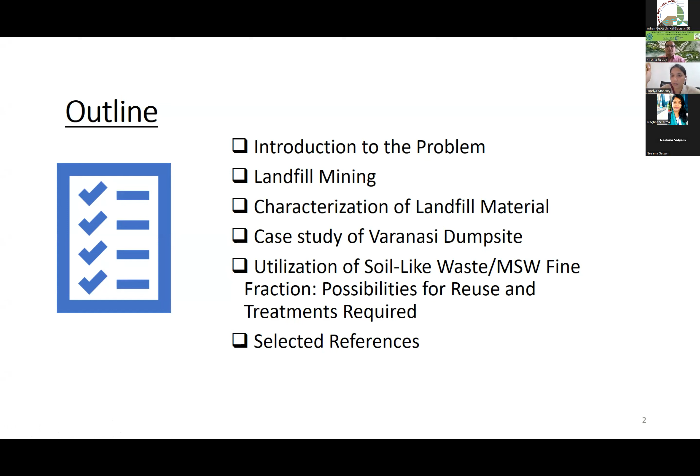We already discussed what municipal solid waste is, and this is the waste we are generating. It is composed of domestic waste, commercial waste, construction and demolition waste, waste from institutes, hospitals, and nearby municipality areas. Combining all, we consider this as municipal solid waste, and the composition of waste changes from city to city and country to country.

So it is our responsibility how we can utilize this huge percentage of MSW in useful applications, particularly in construction or any other useful material.

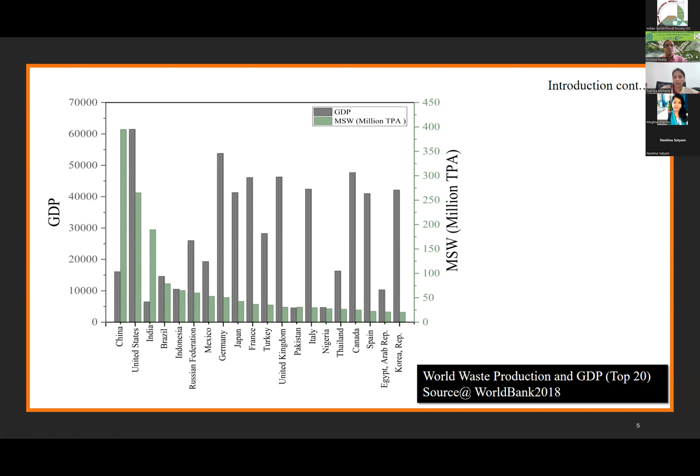Currently we are lacking in the mitigation technique, or management technique, of MSW. So we need to think of this.

The problem with urban solid waste management, particularly in India, is that we don't have a proper integrated waste management technique. If you compare with other countries, Reddy sir is here, he can also address the same. You can see the variability in management technique, and for this we also need support from our government.

Now at least many initiatives have started, like Clean India Mission, Swachh Bharat Abhiyan, so we are getting funds to suggest mitigation or management techniques for solid waste management.

In the Planning Commission report of 2014, nearly 471 million people, about 34.5% of total population, reside in urban areas and generate 62 million tons of MSW per annum currently. It is projected that by 2031, urban centers will generate 165 million tons of waste annually, and by 2050 it could reach much higher. We can imagine how much area we need to dump this waste by 2050, estimated at nearly 43,000 hectares of land needed only for dumping this MSW.

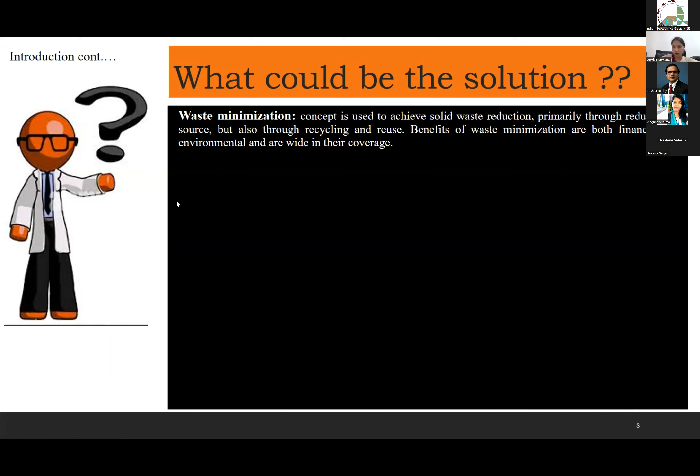At your source point, you can try to reduce the waste. Second, understand the type of waste being generated now. If you compare our waste with other countries, as I showed in the second slide, you can see the composition of world MSW and our Indian scenario.

India is changing from an agricultural based to an industrial and service oriented country, so the waste characteristics and properties will also alter due to changes in living standard and increase in commercialization or urbanization. We need to address this with an efficient waste management system for our particular city - including segregation unit, transport system, monitoring, and investment on infrastructure. We need an integrated solid waste management system for proper solid waste management.

Next, introducing new policy and technique through R&D. Based on research and development, you can try to suggest or introduce new policy or technique for waste management, particularly solid waste management, and some scientific landfill technique also we can suggest.

Landfill mining is the excavation and treatment of waste from an active or inactive landfill for purposes such as reuse of recovered material, conservation of landfill space because space is limited, reduction in landfill area, elimination of potential contamination source, and energy recovery from the excavated waste.

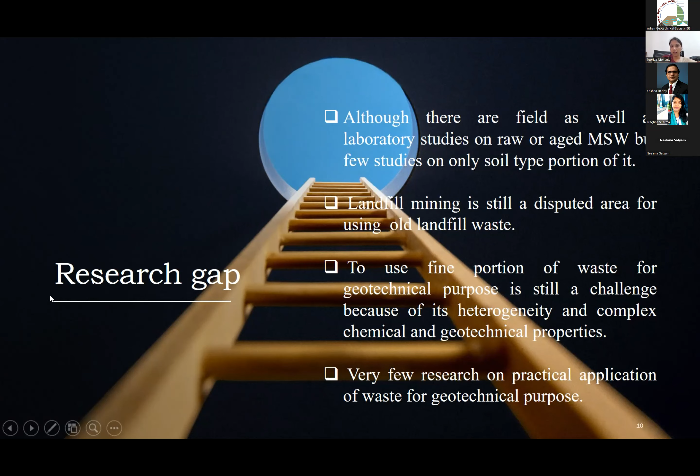Coming to our case study, I will discuss the study done by one of my students for this Varanasi dump area. In this study, we collected raw MSW samples from one dump site, the Ramana landfill site, close to our IIT BHU. Second, we collected the rejected sample from the Karsada plant Varanasi, which is a waste to energy plant.

So they are utilizing the waste to generate energy, and still they have some rejected waste. So we thought of utilizing this rejected waste to improve the properties of this fine MSW fines. After collection of the sample, we went for air drying, then screening by different sieves, and below the 4.75 mm sieve, we considered that as soil-like material for the present study.

For this soil-like material, MSW fines, we have studied its physical, chemical, and geotechnical characteristics. Based on the strength properties, we thought of utilizing waste from another waste-to-energy plant, that is the 4mm rejected sample, the fiber obtained from that second site, to use for improving the soil-like material of the first MSW. So we are trying to utilize waste fiber to improve the properties of another MSW waste, obtaining the optimum fiber composition, and studying its response under different loading conditions.

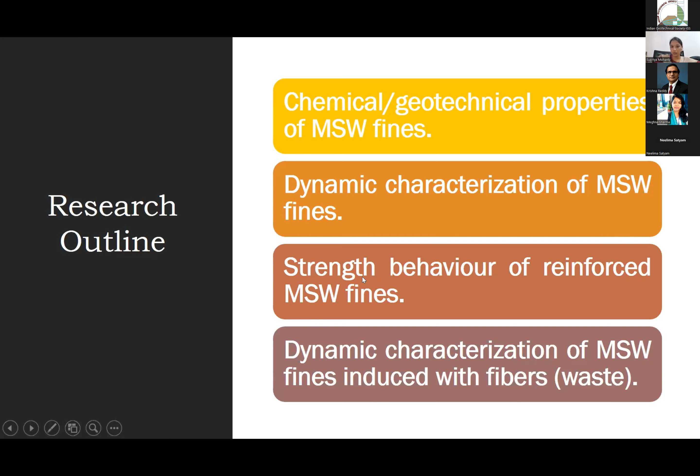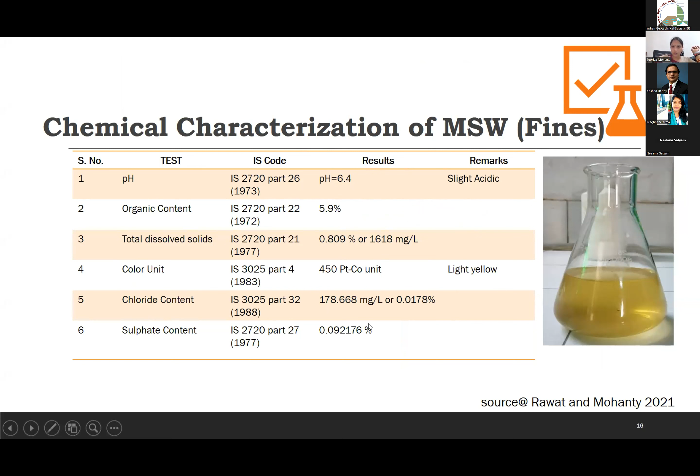The color of this MSW is light yellow, which is a little objectionable, and the chloride, sulfate, TDS content is marginal if you see the percentage. In addition, we also studied the elemental analysis, XRD, XRF, and EDX before strength calculation, because we need to know whether any hazardous material is present in the MSW fines or not. Otherwise, after implementation in the field, it may also affect the surrounding soil and groundwater.

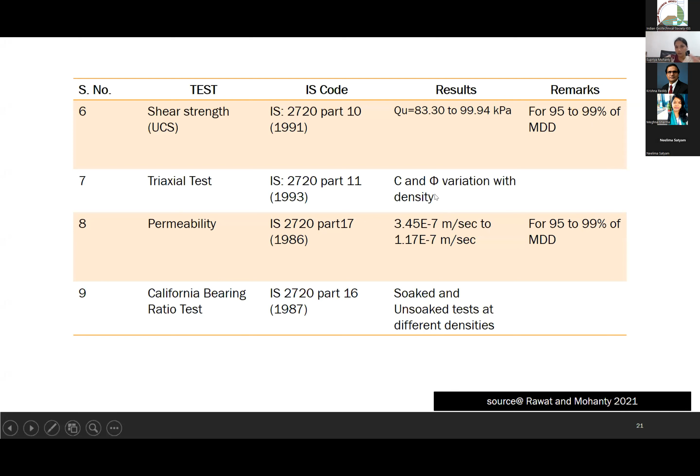So whatever we are getting for the present material, before strengthening it, the raw MSW sample is giving us a good CBR value, which is also suitable for road application. This shows the permeability range. With the increase in relative compaction, permeability decreases. As we know, void ratio reduces, so this means permeability will reduce.

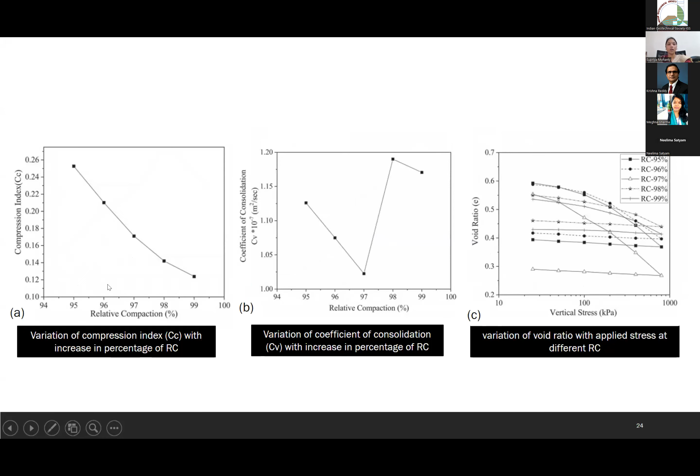The conclusion from this chemical and geotechnical analysis of this MSW fine is without any fiber: nearly 60% of the waste material is non-plastic, silty in type, with medium compressibility, medium permeability, and it is giving us good shear resistance. And if you see the specific gravity, 2.32, this low specific gravity makes it suitable for lightweight fill material. However, the concentration of a few heavy metals, organic content, and color of the leachate could create serious problems if neglected during application. So proper treatment must be required before final implementation in a specific project.

So next, as this present study area is seismic zone 3, we thought of analyzing the dynamic characteristics, because you know how frequently we are experiencing earthquakes, if not in our country then in our neighborhood. So we need to understand the dynamic strength of this proposed material. As you have also seen, after the 2015 Nepal earthquake our code has been revised. We are waiting for another major event, then we will try to improve again. In our revised code, some guidelines have been included for liquefaction study and dynamic study also. So for that reason we thought of finding the dynamic characteristics of this MSW fine, so that seismic analysis can be done for any structure, whether embankment, road, or railway embankment. We need to know the dynamic properties of the subsoil or foundation material.

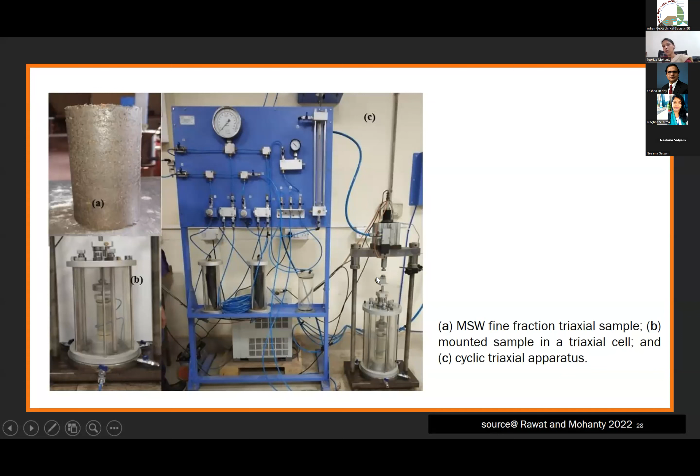So we tried to use whatever facility we have in our lab, the cyclic triaxial setup, to find the dynamic properties: shear modulus and damping ratio. This shows the setup available with us. This is the MSW sample, source sample without fiber. This is the cell, and this is the assembly with the mounted sample. We have to apply this cyclic load by means of this actuator. We can apply both stress and strain control. We have tried strain control, and from that we can get the hysteresis loop stress-strain curve.

This shows the typical cyclic results. This is the input axial strain from the strain control test, and this is the deviator stress variation with number of cycles. The deviator stress is decreasing with number of cycles. Here you can see the pore pressure is increasing, and this shows the hysteresis loop.

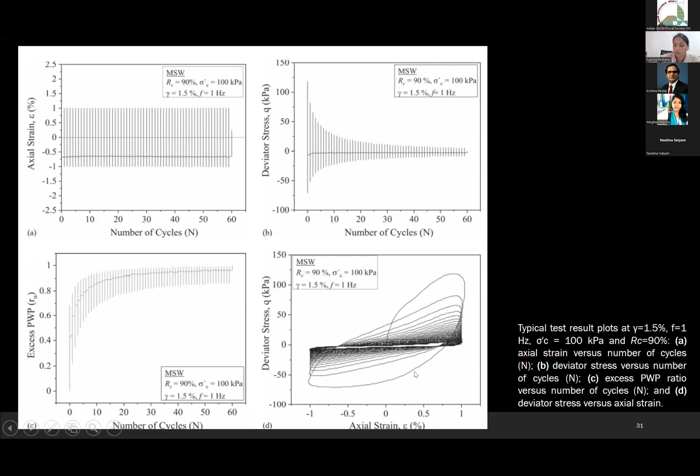So for dynamic properties, we need this stress-strain plot. This one we have used for calculating G and D.

Due to strain consideration, since we are doing cyclic triaxial tests for high strain conditions, the damping ratio may decrease with strain under high strain conditions. This has been addressed by a few researchers.

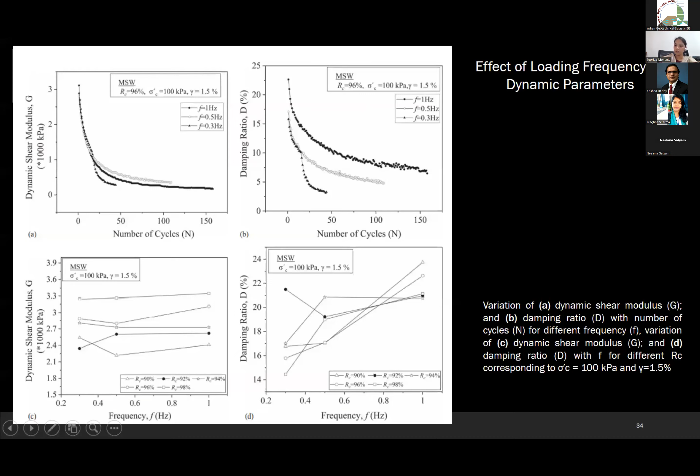The frequency effect is not significantly affecting the strain. If you look at dynamic shear modulus, there is no significant effect of frequency noticeable from this figure. A similar observation has also been noted by past researchers for soil type material, meaning silty sand, not MSW.

For material damping ratio, composition is most important, and confining pressure is likely important, but unit weight and loading frequency are not that significant. This has been reported by many other researchers for MSW and sandy type soil material.

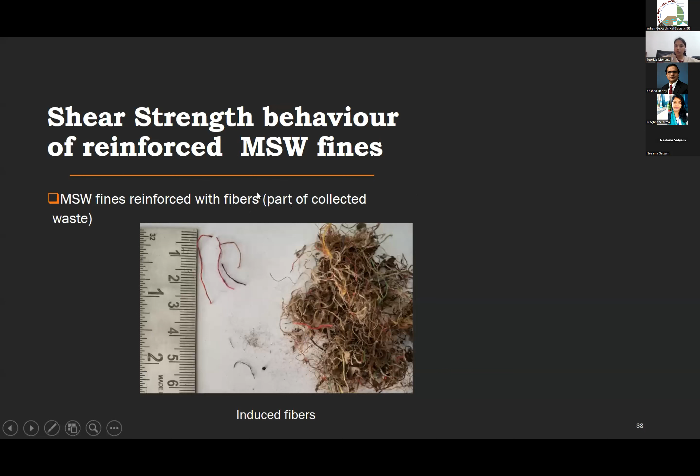Then after that, we try to improve the shear strength behavior of the MSW fines by reinforcing with another waste fiber. These fibers are part of the collected waste from another waste-to-energy plant, the Karsada plant in Varanasi. This plant is basically a waste-to-energy plant, and from that plant they are generating RDF rejected samples which they dump at the nearby site. So we thought of collecting this RDF rejected sample and trying to use the fibers to improve the MSW fines.

So this is the RDF rejected sample collected from the Karsada plant and segregation process, and this is the final fibrous material. This fiber we are trying to use for improving the strength characteristics of the MSW fines. So we try to vary the fiber percentage from 0.5 to 10.

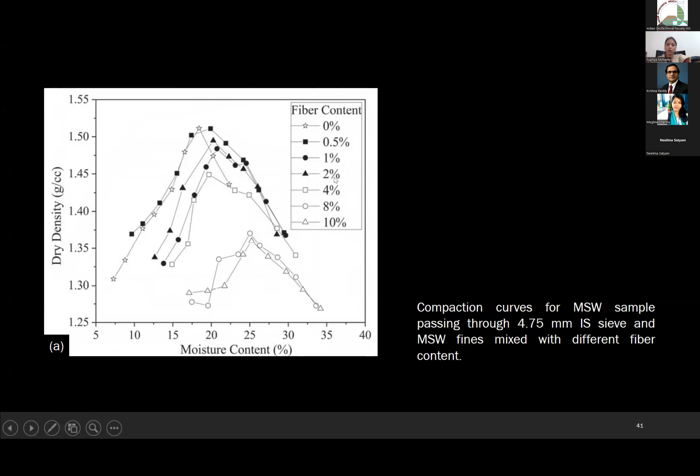Here also we try to check two conditions by fixing the density: one is whatever the MDD of the original source material, 1.51, and another is whatever density we are obtaining from this compaction curve. Suppose for 0.5% this is the MDD, for 1% this is the MDD, for 2% this is the MDD, and similarly for 10% this is the MDD.

This one represents varying density. Varying density means for different fiber concentrations, whatever MDD we are getting, for that we have tried to study the strength properties, C and phi. For both cases, you can see after 8% fiber concentration, there is not much variation in friction angle. So based on this, we have considered 8% as optimum.

Then we have compared 0% to 8%, this optimum fiber concentration, for cohesion and angle of friction. Here you can see improvement in cohesion and angle of friction, and also the strain range. If you see the strain range, it is close to 20%, meaning with reinforcement, using this fibrous material to reinforce the MSW fines, it may allow more deformation. You can see this from the axial strain-cohesion curve and friction angle-axial strain curve.

So conclusion from this fiber reinforced waste study, particularly the static study we did: the addition of waste fiber, optimum at 8% by weight, shows remarkable improvement in the strength characteristics of the MSW fines, with both C and phi improvement noticed here. The considered material after reinforcement can be suggested as embankment or subgrade material.

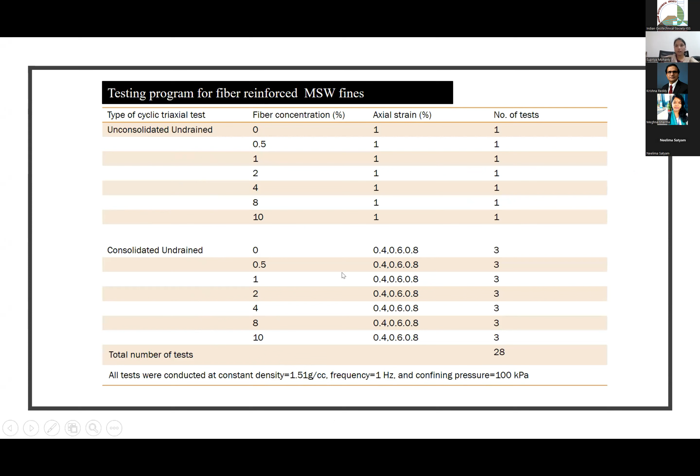Then we thought of doing the dynamic strength characteristics of this reinforced MSW fines. Here we have tried to study both unconsolidated undrained (UU) and consolidated undrained tests. We have considered the test for constant density, constant frequency, constant confining pressure, by varying the axial strain, for different fiber concentrations.

What we are getting here is no improvement in dynamic shear modulus with the inclusion of fiber, but static strength improvement is there. Both C and phi friction angle have improved from 30 to 39. But dynamic strength or stiffness improvement is insignificant here, and damping ratio is similar to previous results.

This shows the outcome of our reinforced dynamic study: the G value decreases with increasing fiber concentration, and damping ratio shows a random trend. So the conclusion from the fiber reinforced waste dynamic study is there is no improvement in dynamic strength G value of MSW fines with fiber content, though degradation of strength is comparatively low at higher strain. Degradation is low, but strength improvement is not there.

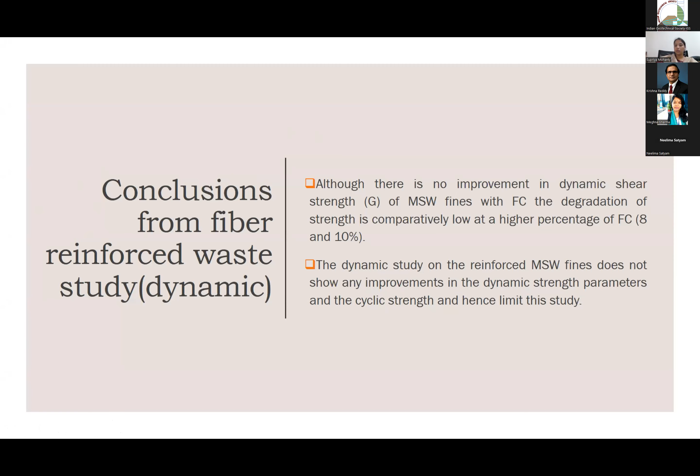So from this we can conclude this material can be used for low risk seismic zones, under even low to high embankments. But for high risk seismic zones, we need to improve the dynamic properties of the material, strength properties first, then we can recommend. For zone 2 or few portions of zone 3, it can be used for low rise, low height embankments. Based on our conclusion from static and dynamic study, there is no improvement in dynamic properties.

So we thought let us recommend the material to be used for road embankment. We recommended this for a 4-lane road embankment near the same Ramana site where we collected the sample. We obtained the soil sample from the same site for this report, and by considering the existing foundation soil and subsoil properties along with the MSW fines from our study, we tried to analyze the embankment problem using Plaxis 2D.

The total top width of the embankment for 4-lane we considered as 16 meters, side slope 2:1, and traffic load of 10 kilonewton per meter square. Low traffic load was considered earlier, but it can be studied further. The water table at the site was far below, so we took the data at 13 meters based on this report. Then these are the parameters.

This embankment fill material is whatever MSW fines we obtained from our study, and these subsoil properties are for the actual soil profile of this Ramana dump site.

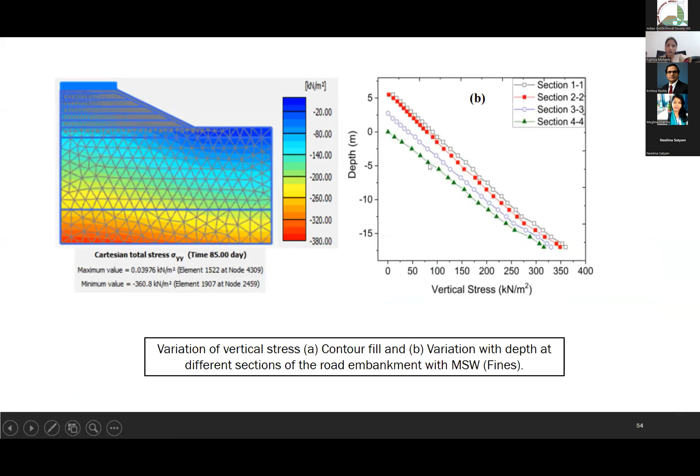In addition, we thought of calculating the settlement since we have consolidation data from the consolidation test done on the MSW fines. From analytical calculation, we get nearly 70.9, around 71 mm of primary consolidation settlement. The vertical settlement from the numerical analysis is 55 or 56 mm. The analytical value is a little higher because of the elastic properties consideration and the many assumptions made.

The conclusion from the numerical study is that the total settlement, calculated both theoretically and numerically, is found to be below the allowable settlement recommended by IRC 75, 1979, for design of low embankments. The allowable settlement is 300 to 600 mm, and we are getting even from the analytical expression 71 or 70 mm. So without any treatment, the settlement value is within the permissible limit, particularly for low embankments. Even for high rise embankments this range may change, but we need to check. So we suggest this material for embankment fill.

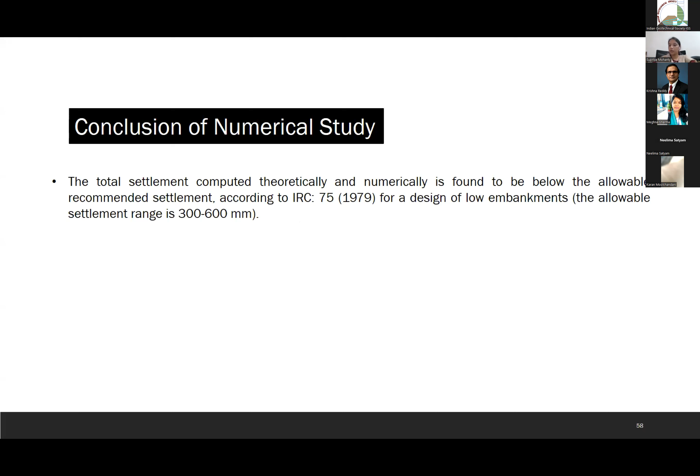So they are going to implement this near the plant site area. Concluding remarks from our study: this study particularly focuses on how to reutilize the waste portions, particularly MSW fines or reinforced MSW fines, in various geotechnical purposes.

The sample can be suggested for use in low seismic zones, because in high seismic risk zones the dynamic strength properties should improve, but we are not getting that for the considered fibers. If we use other materials, we need to think about how to improve the dynamic properties of this MSW fines for utilizing in high seismic risk regions.

But currently, it can be used for low seismic risk zones, as embankment and backfill subgrade material with low dynamic load in small projects, because we have good compaction properties and shear strength properties also. However, before final implementation, we need to at least improve the chemical characteristics of this MSW fines. A few treatments may be required, and after treatment it can be finalized.

Based on the chemical composition or chemical characteristics outcome, you need to decide which option to choose for improvement. Either you can mix the MSW fine with local soil or lime to balance the pH value, and to reduce the color effect, you can wash it.

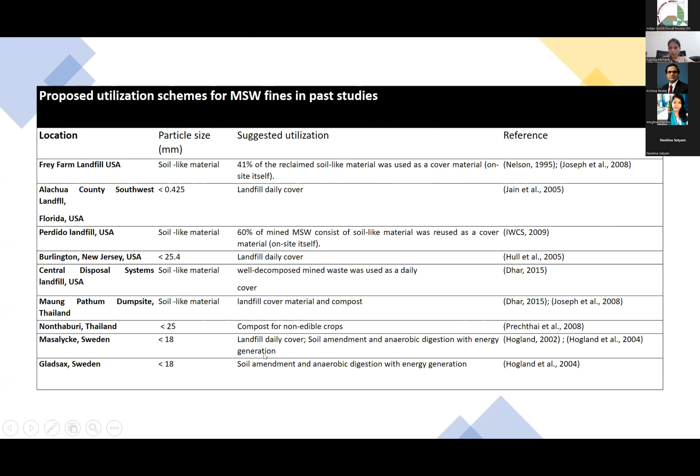The proposed utilization scheme for MSW fines in past studies—you can see many other countries also utilizing this soil-like material. Here I am talking about only the fine fraction soil-like material, used as landfill cover, and if composted, also in a few cases as sub-base material, with most cases being landfill cover material. In Delhi's Gazipur area, they are using it as embankment fill.

And as seen in this dominant case, we are suggesting it as embankment fill. Recently, the National Highway Authority of India, last month in February, asked the Municipal Corporation of Delhi to provide 364,000 tons of inert material for the construction of the urban extension road project.

So they are going to utilize 364,000 tons of garbage from the Gazipur and Okhla landfills for road construction—this is for a national highway. Previously they had recommended it for embankment fill, and based on their observations, now at least the Indian government is planning to utilize this waste in national highways.

So we need to think about different applications where this waste can be utilized. In this study, I have focused on MSW fines, but there are many other ways we need to think about utilizing it, because we can't reduce it. We know we can't reduce it—as the population increases, waste generation will also increase. The key is how to manage it properly and utilize it.

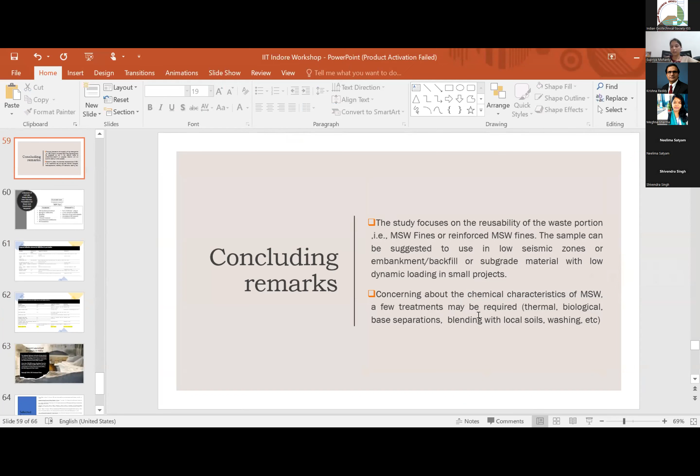So, as there is heterogeneity in the MSW composition, there may be a chance that heavy metals are present, so we need to reduce that before field implementation. Pre-treatment is needed, and also monitoring, whatever Krishna Reddy sir has addressed. We need to monitor whatever we are getting, because whatever we are studying is in a controlled lab-scale environment. But in the actual field, whether the same thing is going to be maintained or not, we need to monitor that. We know our scenario in India, how quality control is maintained. So pre-treatment, meaning chemical treatment, is a must.

Thank you for your answer, ma'am. Just one basic question also - maybe you informed but I didn't get that. How much MSW fine material do you get from the overall waste collected? Nearly 60%. Okay, thank you, ma'am.

You're welcome. All the best.

I was just looking at the chat to see if there are any questions. I don't see any question there. Okay sir, if there are no questions, shall we wait or proceed? No, we can proceed if you want. Sure, sure, okay sir, thank you.

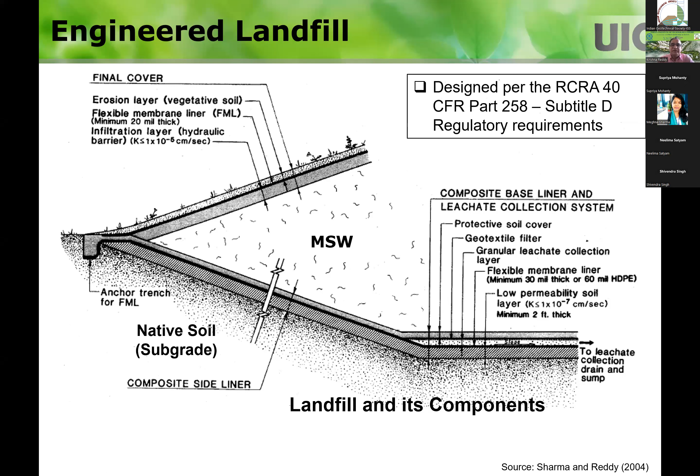The complete design of landfills is fairly well established, and in the US, consultants can easily handle this job. These requirements follow RCRA, the Resource Conservation and Recovery Act, and similar regulations are followed by many other countries - I believe the Central Pollution Control Board has similar regulations.

These landfills are designed, constructed, and operational this way. Some landfills have been operating for 2-3 decades with extensive ongoing monitoring, and all that data shows that landfills designed and constructed per these specifications work very well - there's no leachate migrating into the subsurface, and no groundwater or subsurface contamination problems. It's proven that this landfill design is the best way to contain waste.

Contamination of the subsurface and leachate are not problems, but as I showed in my last presentation, even with properly engineered liners, cover systems, and gas collection systems, there's still a problem of fugitive emissions. The solution for that is biocovers or biogeochemical covers, which I discussed in the last presentation. So that issue is addressed.

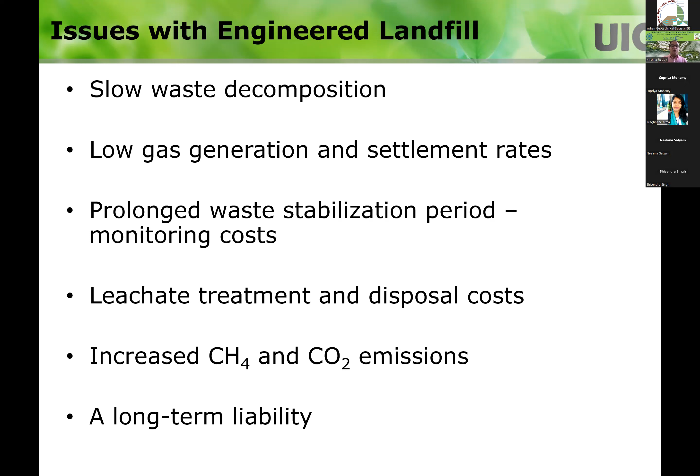All these things are going to be there. And then treating that leachate on a constant basis, or disposing, that is going to incur a lot of costs for the landfill operators. And then these methane and CO2 emissions are going to be emitted into the atmosphere, and that's going to be a problem. There could be fugitive gas emissions, depending upon how you cover the landfill, or during the filling operations. And then it's a long-term liability, because things are going to take a long time, so you have to incur the cost for a long time, and the site is not going to be used for a long time. So as a landfill owner and operator, you're going to be responsible for all kinds of issues associated with this landfill over a long period of time.

So the question is, okay, it's working good, but we have all these issues. What is the potential solution? The potential solution is the bioreactor landfill. So what is it?

Bioreactor landfill is exactly the same as the engineered landfill that I described before. The only difference is that the leachate that comes to the bottom of the landfill, instead of collecting it and treating on site, or transporting and treating off site, what we do is we collect the leachate, and in a controlled fashion, we inject it back into the waste. To inject back into the waste, you could use vertical wells, or a series of horizontal wells. The whole idea is to re-inject that leachate into the waste, such that the waste gets adequate and uniform moisture content, so that the degradation of the waste can accelerate.

So what are you doing? We are taking out the leachate and then re-injecting it into the waste using these leachate recirculation systems. And one thing we have to realize is that once you increase the moisture in the waste, that's going to accelerate the degradation, and you're going to start getting the gases very quickly. So you need to have an immediate gas collection system. In a conventional landfill, you could take some time, because the waste is not going to degrade faster, so you can take time to install the gas extraction wells. But in bioreactor landfill operations, you need to be ready and expect the landfill gases to come out really fast. So you need a system to remove and use it for power generation, or whatever you want to use it for.

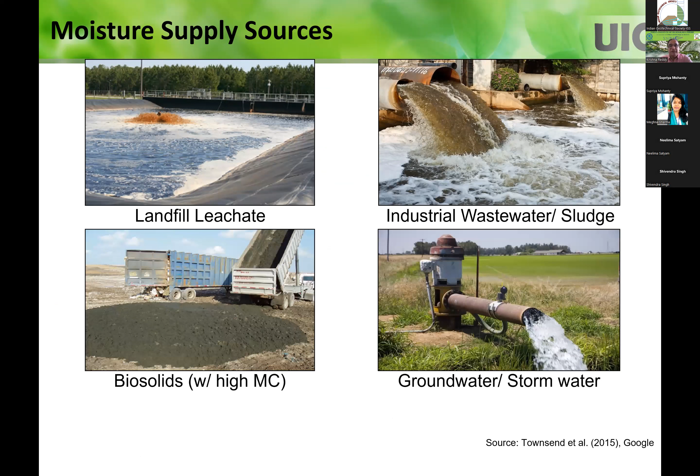As I told you, landfill leachate is the one commonly allowed to be re-injected. But in theory, you could use industrial wastewater or sludge, biosolids with high moisture content, or groundwater or stormwater. The regulating authorities will have no problem with using landfill leachate generated at the same landfill, but if you want to use these other liquids, you need a special permit from regulating agencies. There are very few landfills that operate in a true bioreactor landfill sense using liquids other than leachate, so keep that in mind.

Leachate recirculation is important. So what ways can you introduce the leachate into the landfill?

There's drip irrigation: you put the waste down, then have a drip irrigation system on top. There's spray head application during filling. There's tank truck application, where you collect the leachate, put it in a truck, and take it to the top of the landfill. As the waste is placed, you can spread the leachate.

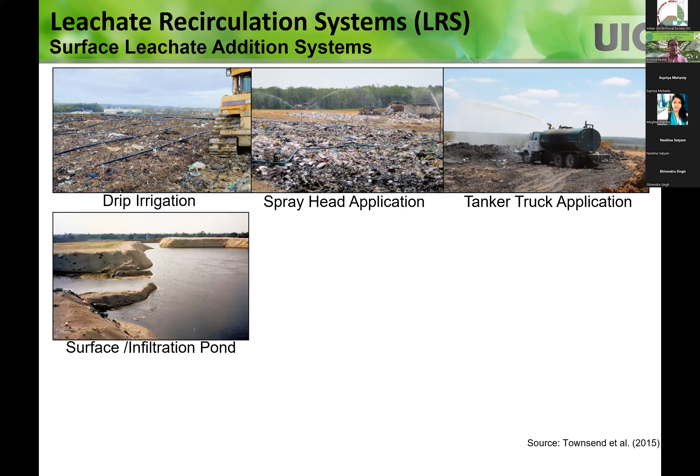Sometimes you can create ponds or infiltration ponds on top of the waste, or have shallow surface trenches where you put in the leachate, or deep surface trenches for the same purpose. These are all leachate injection methods done from the surface, and they each have some advantages and disadvantages.

What are the other options? Another option is vertical wells. You basically dig a well into the ground, into the waste, then put a slotted pipe in it, with some kind of filter pack around it, it could be gravel or any permeable material, and then you inject the leachate through that.

These wells are located at different depths, and the screen depth has to be varied, so you place a bunch of these vertical wells in the landfill waste and inject into them. It's typical drilling: putting in the slotted pipe, adding the filter material, and sealing at the top, you want to make sure that sealing is done properly. This method also has advantages and disadvantages, and these wells have to be installed after you fill up the waste in the landfill cell.

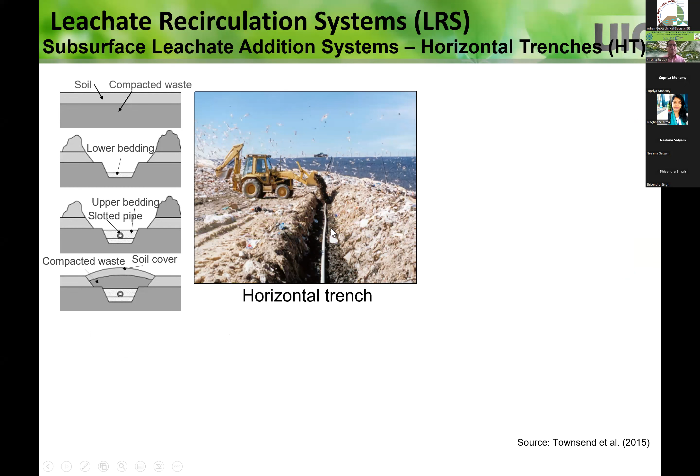The other way is horizontal trenches. These have to be installed during the waste filling. Let's say you fill waste up to a certain depth, then dig a trench, put permeable material around it, and add a slotted pipe. You inject the leachate at one end, and with pressure or gravity, it gets distributed through the trench and into the waste. Then you put more waste on top and add another layer of horizontal trenches. You can have multiple trenches, spaced horizontally, with different levels as the depth increases. These also have advantages and disadvantages.

So then the other one is the drainage blanket.

The drainage blanket works like this: you place waste up to a certain height, then put a thin layer of permeable material with a pipe running through it, and introduce the leachate from that pipe. Since this layer is more permeable than the waste, the leachate flows horizontally through it and then vertically down into the waste, spreading over a large area and infiltrating the waste. This is called a drainage blanket.

These have to be used during the filling stages. Only vertical wells can be used after the waste is completely placed, where you drill the wells and install them. Horizontal trenches, surface methods, and drainage blankets all have to be done during waste filling. The main problem is that you need to have this drainage material.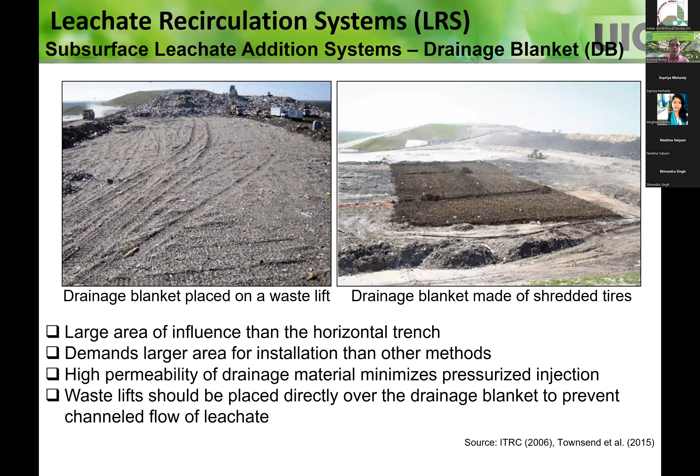People have started using shredded tires, glass cullet, or other waste materials, spreading it out and using that as a drainage blanket. That can be done, but you need a lot of coordination. Most commonly though, we use horizontal trenches if planned ahead from the beginning; otherwise, you use vertical wells.

When designing these leachate recirculation systems, you need to think about many issues: the leachate volume to be circulated, how much moisture increase you need, what the initial moisture content of the waste is, how much increase in moisture you want, how much moisture is taken up by biodegradation, and the source of moisture supply.

You need to know the rate of leachate injection - how much leachate is available, and what the pumping capacity of the leachate recirculation system is. Also consider waste hydraulics: the porosity and permeability of the waste. You cannot inject as much as you want because the permeability may be low. Permeability could decrease with waste degradation, or the permeability of lower layers may be lower due to overburden waste.

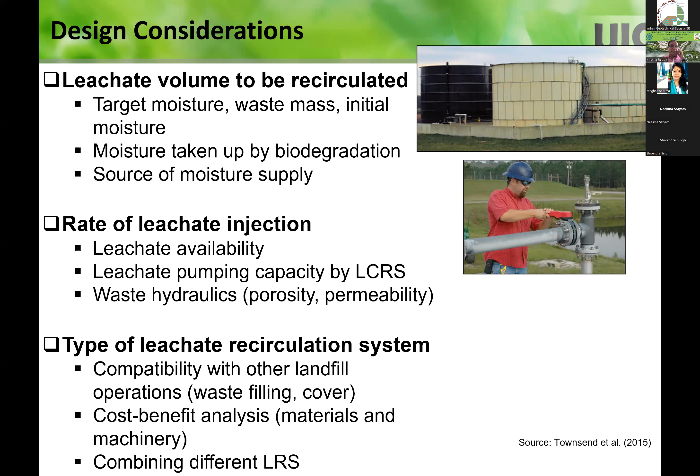Consider the type of leachate recirculation system - you have different systems as I've shown you - and the configuration and layout of the system, meaning spacing both in plan and depth. If you're using vertical wells, horizontal trenches, or drainage blankets, you need an idea of how many you need and what the spacing should be, both depth-wise and in plan view.

Also consider the stability of the leachate recirculation system. You want to make sure the pipes placed to recirculate leachate are stable. If there's differential settlement and these pipes break, that line won't work, and you won't distribute the leachate uniformly.

Consider leachate injection pressure - how much pressure should be used, especially near the edges and side slopes. If your leachate injection system is close to the slope and you're injecting under high pressure, you could create excess pore pressures and endanger slope stability. You need to maintain a setback distance and keep pressure within limits to avoid slope stability issues.

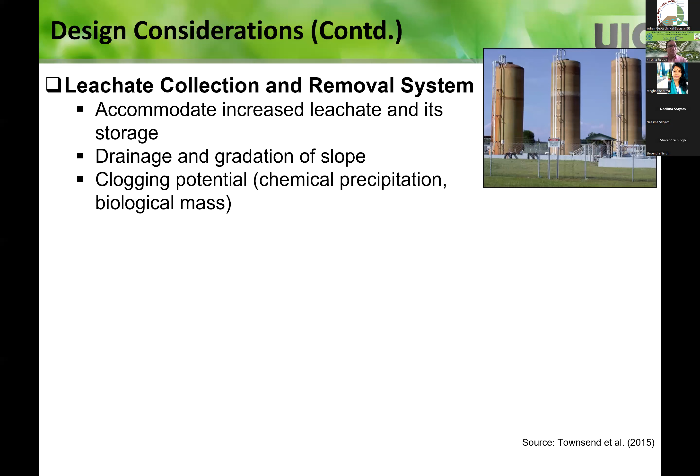Also consider the leachate collection and removal systems - make sure it's properly designed since you're circulating the leachate, and ensure it doesn't clog up. If the leachate collection and removal system at the bottom clogs, you can't remove the leachate and perform recirculation. The liner system has to be good, because we always have to maintain less than 1 foot of leachate on top of the liner.

Temperature and chemical compatibility are also concerns - I'll talk about that. You're going to increase temperatures in the landfill, and the liner should remain stable under those conditions. Leachate contains a lot of chemicals, so the liner system should have resistance to those chemicals. All these things have to be taken into account. Slope stability is a big concern.

So important thing is, when you are injecting the leachate, you're going to have excess pore water or gas pressures, and you need to evaluate the stability of the slope due to those increased pressures. Then also with time, due to waste degradation, the waste properties are changing. The unit weight may be changing, and shear strength may be changing. So if the unit weight increases, or the shear strength decreases, that would endanger the slope stability. That has to be checked too.

The capping and cover systems have to be checked properly, so that we can install the gas collection systems properly. The capping and cover have to be stable under this accelerated displacement that's happening.

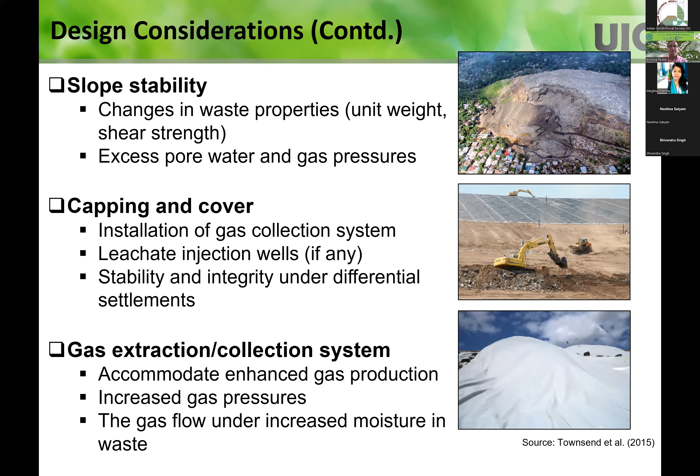Leachate availability is the big issue. Do you have enough leachate in the landfill? In some landfills a lot of leachate is generated, and at other landfills you don't have enough. You really want to put more leachate into the waste so that the moisture content can increase really fast. But if you don't have enough, or if the leachate recirculation system is not efficient, then you will not be able to distribute it.

Leachate injection operations - how are you going to inject? You have these horizontal trenches and vertical wells. You're not going to inject leachate into all of them at the same time and continuously. So you decide the mode of injection: intermittent or continuous. For some period of time, you will put it along certain lines of the leachate recirculation system, then stop it, and inject in other lines, repeating this several times. So that's what happens.

And you have to have an operator. The operator has to kind of feel it - where is the excess moisture going? If you put excess moisture at one location, that's the place that's going to degrade most, and you could have excess gas pressures, but other places may not be experiencing that. So the on-site operator will play a major role in these bioreactor landfills.

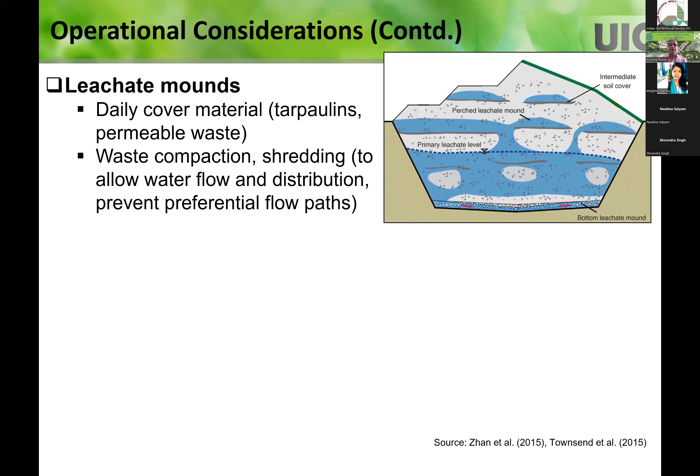And leachate mounds - when you are injecting it, the waste is highly heterogeneous, so you may have pockets of waste that are low permeability. If you're injecting leachate, it might go and accumulate on top of that low permeable waste zone, creating a perched leachate condition. So you have to look at all those aspects.

Gas extraction - you need to look at accelerated gas production, and since you are putting in moisture, the moisture could be coming along with the gases, and if you saturate it, you're not going to get any gas. So you need to optimize that gas extraction.

Seepage control - you're injecting the leachate, right, and then you don't have any control. It's highly heterogeneous. Generally the lower layers will have low permeability - you have basically stratified waste with different hydraulic conductivities. So leachate tends to move horizontally, and if it comes to the edges and seeps out, then you have a problem - the leachate is not contained.

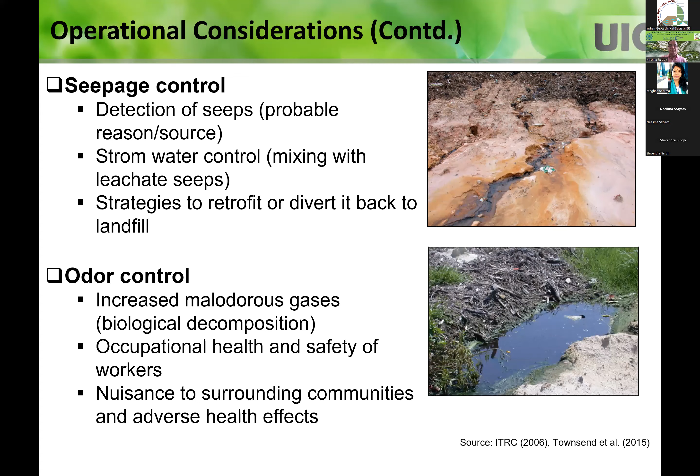Other problems: you're accelerating the degradation, and a lot of H2S is generated, which smells bad and could raise a concern. Differential settlement is a big concern, because if you don't distribute the leachate uniformly, or if the waste is not uniform, you're going to have differential settlements taking place. The leachate collection system has to perform really well, and inspection and recording has to be done constantly.

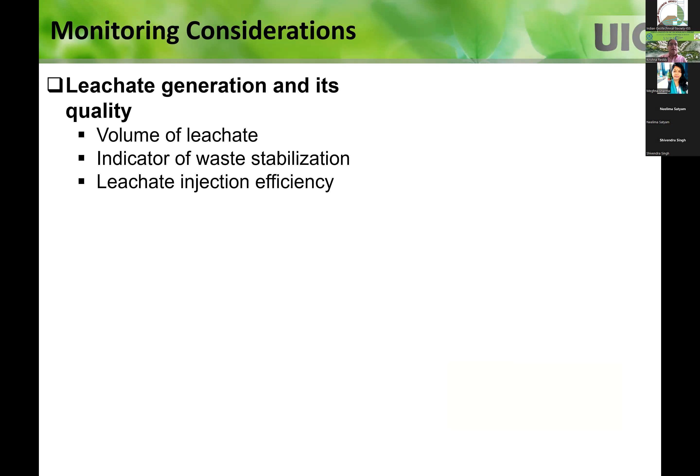One has to monitor during all these operations how much leachate is generated and what is its quality, how much you are distributing it, what are the pressures, that needs to be monitored. And the waste condition, how is the waste degrading, what stage it is, how the geotechnical properties of the waste are changing with the degradation. All these things somehow you need to monitor and take into account if there are any issues with those changes.

The waste settlement rate is going to be faster. In a way, it's good, because if you are operating these bioreactor landfill operations and the waste is settling, you didn't put the final cap on yet, generally they put a temporary intermediate cap on top. So the waste is going to degrade and settle, meaning you can bring in more waste. After some time, you can take out the intermediate cover, put in more waste, and then put the final cover on top.

So landfill guys like it, because you can add additional volume of waste on top of the settled waste. The gas quantity and quality needs to be monitored with on-site probes in the gas extraction wells and around the landfill, and the temperatures have to be monitored too.

And then in terms of cost, you have to think about a traditional landfill. The cost of construction for a traditional landfill is going to be slightly lower than a bioreactor landfill, because in the bioreactor landfill you have this additional leachate recirculation system that you have to build.

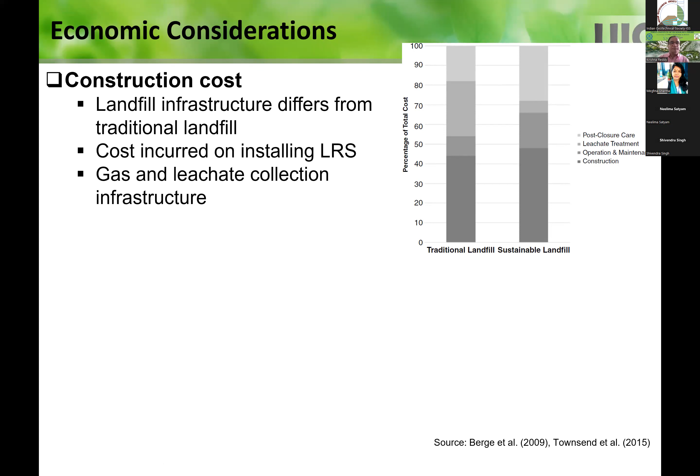So those are the things I mentioned. And then, energy revenue. In a conventional landfill, you're not getting reliable amounts of gas, so you don't produce much energy. But in case of bioreactor landfills, you can, with confidence, create energy from the collected gas. That can create revenue and offset the additional costs incurred by installing leachate recirculation systems and operating the bioreactor landfill.

So you're going to have a lot of potential savings: reduced leachate treatment, landfill air space gain. As I said, if it's settling due to bioreactor landfill operations, that extra volume lets you put in more waste, and that generates savings.

So in India, at these legacy dumps, these have been there for a long time. Aerobically or anaerobically, all the organic matter has been gone, degraded. So you basically have inerts with no organics.

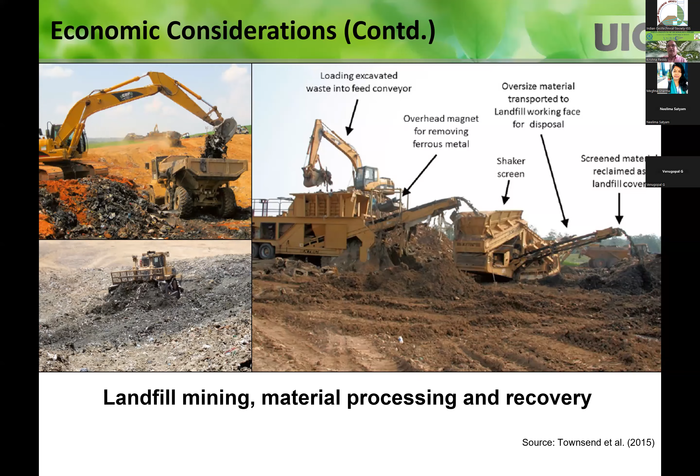So this is great, right? Bioreactor landfill is great, but there are a lot of issues that have to be considered carefully compared to traditional landfills. So in terms of practical challenges, if I want to use bioreactor landfills, there are some issues that we have to be extremely careful about.

The first one is optimizing the liquids injection. How can we inject so that we get uniform moisture distribution in required amounts? We don't want too much excess moisture, and we don't want heterogeneous distribution, where some places have moisture and some don't. So how do we optimize that leachate re-injection into the waste so that we can get uniform and adequate moisture distribution?

And if you are very aggressive in leachate injection, or if you don't plan properly, you could cause slope stability failures, slope failures. That could be a huge shame as an engineer or operator. So you're trying to do this novel technology, and you didn't consider the liquid pressures and excess water, and then you cause the failure of the slopes, which you don't want to happen. Any slope failure will be very difficult to fix, with delays and costs associated with it.

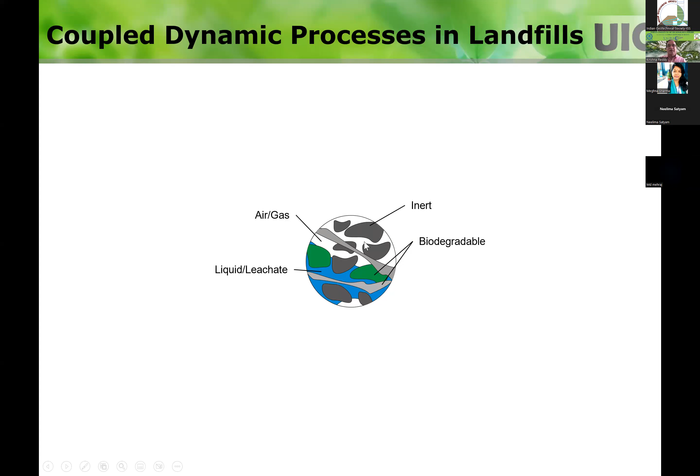And why do we have to worry about all these things? If you think about the waste as biodegradable solids, that's organics, and then you have inerts, that's like a porous media. Within the pores, you could have leachate, and within the air voids, you could have air or gas. Basically, we are talking about landfill gas and landfill leachate in the pores. So like soil mechanics, we consider the soil a three-phase material: solids, liquids, and gas. The gas and air and liquid, air and water that we consider, but instead of air we have gas, and instead of water we have leachate. And instead of just calling the solids, we have inert solids and biodegradable solids.

So this makes it a little bit more complicated because we are injecting the leachate. You need to look at how the leachate and gas are going to flow through it, how the moisture is going to be distributed, how the liquid and gas pressures are going to be generated. So we have the waste and we are injecting the leachate, and you have these hydraulic issues.

And then as the moisture is distributed and increased, you're going to have increased microbial activity. This comes out of biochemical processes kicking in. Due to microbial activity, some organic solids are converted into gas phase, and gas is generated, which could also affect the leachate characteristics. So as moisture is introduced, you're going to have all these biochemical processes happen.

Due to these biochemical reactions that happen, that generates heat. So then you're going to have heat generation, and heat is going to be distributed within the waste, and then you could have some heat loss. So you have these thermal processes happening due to the biochemical process.

Now the solids are lost, you have moisture, you have heat, and that's going to affect the mechanical response, right? So the deformation, strains, stresses, constitutive behavior, strength is going to change. But this is not steady state. As you increase the moisture, these things are going to change: hydraulic, biochemical, thermal, and mechanical.

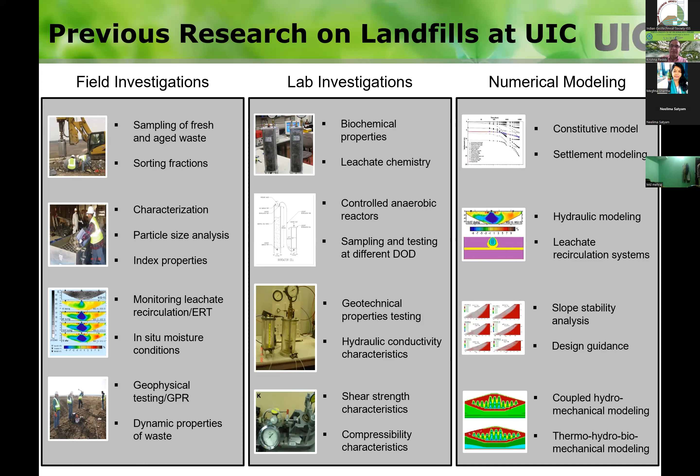So we have been doing all these things, and as I mentioned, I gave you the link to the publications - you can find many papers we wrote on all different aspects of these field investigations, lab investigations, and numerical modeling. What I want to show you is the development of this coupled thermo-hydro-biomechanical model. I don't want to go into a lot of details, but give you an overview of this model and how it could be utilized to understand bioreactor landfills at field scale.

This is a multi-year effort. Initially we said, let's look at only a flow-only model - flow with a simplistic mechanical model, not putting in biodegradation or thermal issues. The whole idea was, let's look at the system as we are injecting it - how do we optimize the leachate recirculation system? This is the PhD thesis of my student in 2012. The goal is to develop a two-phase flow hydraulic model to predict leachate recirculation in landfills.

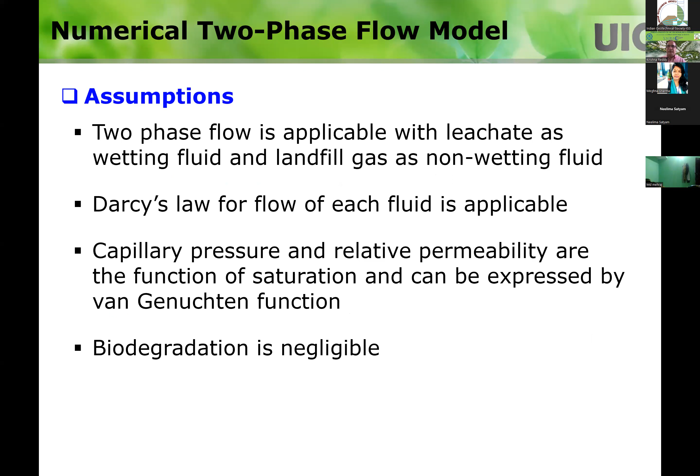So what we did is two-phase flow modeling - you have landfill gas and leachate. We assumed Darcy's law is applicable. We have capillary pressure, relative permeability, which are functions of saturation, and we use the Van Genuchten function. Biodegradation we assume negligible. Then we use these permeability relationships, and we use Darcy's law for multi-phase flow for leachate and gas.

And then we have these constitutional laws. Based on this, we can calculate the saturation and pressures of liquid, leachate, and gas. In this one, we have a mechanical model. Basically, we use a Mohr-Coulomb model as a default. Pressure changes cause a change in the effective stress, and that effective stress is taken into account in calculating the deformation. So it's a very simple way of accounting for mechanical aspects.

So the Mohr-Coulomb limited hydromechanical modeling was done with this approach, using Mohr-Coulomb failure criteria, but predominantly we focused on hydraulics. So we did this one.

Then we said, always in modeling, validation is important with lab results or field results. So for this hydraulic modeling, we looked at the literature and did our modeling. We did testing also, but we didn't do large scale testing, we did small scale testing.

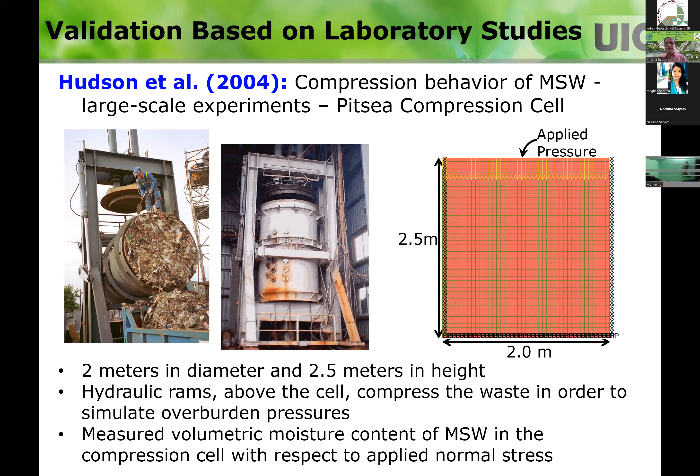All our modeling was done in FLAC, and of course we had to create our own subroutines in FISH code for incorporating our specific features. So then we applied that, and we compared applied stress versus volumetric moisture content, and it was able to capture it reasonably well.

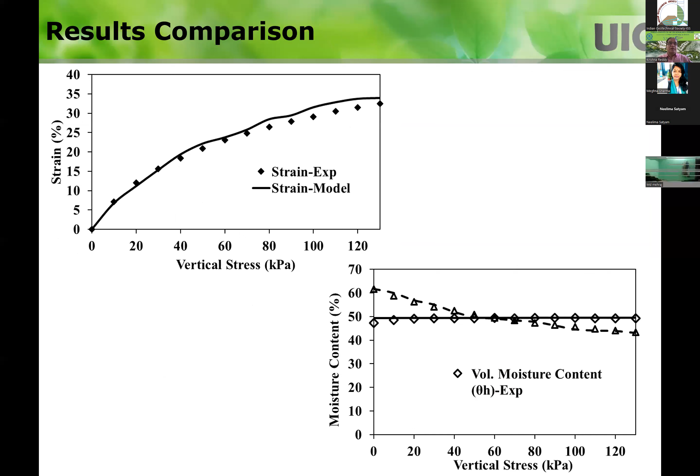Then we looked at other studies. Olivier and Gourc did this in an interesting way with extensive monitoring. They had a square tank cell, 1 meter by 0.98 meters, filled it with waste, added moisture initially, and then tried loading it by increasing the vertical stresses. They were monitoring different aspects like stress-strain and moisture. We applied our model to these experimental conditions and were able to predict reasonably well.

Then we looked at another reported study. They had big tanks filled with waste, and they were doing leachate injection without applying any load on top, but used neutron emitter detectors for looking at moisture variation across the depth. We modeled the same thing, and at different times they measured the moisture through the entire profile of the tank. Comparing that with our model, pretty reasonable agreement was found.

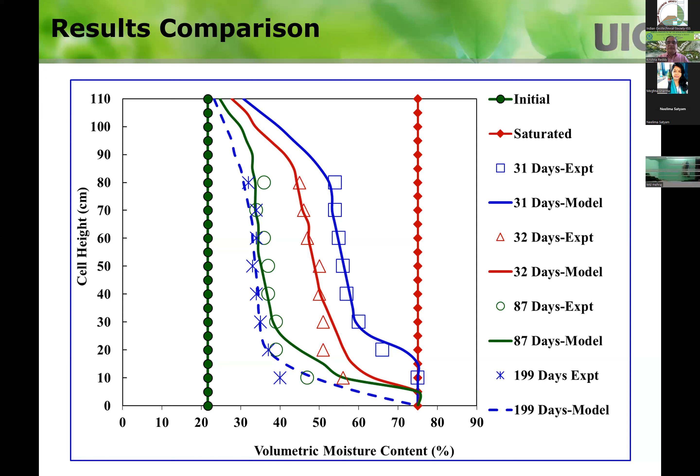Again, we tried to find as many cases as possible to see whether our model is reasonably good or not. This is another study, done by Staub. Again, we plotted these results, cell height versus moisture content, looking at what happens at different times during different induced moisture conditions in the waste.

Then we looked at some modeling cases. Some people have done modeling, or also some field scenarios. We wanted to look at those conditions also.

This was in the field - Khire and Haydar had a drainage blanket. They put a pipe in there and injected leachate, trying to see how the leachate is distributed horizontally and then into the waste. We exactly simulated what they had done in the field, and we were able to compare how far the leachate could migrate. In the field, they found 25 meters, and our model showed 23.5 meters, which is very close. That's the only study we could find in the field.

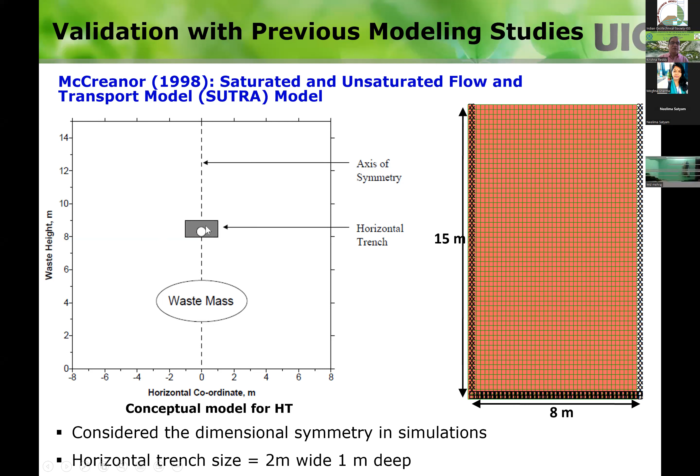Then we looked at whether anybody else did any hydraulic modeling, and we found some studies that used the SUTRA model, assuming a hypothetical scenario for hydraulic flow modeling with a horizontal trench. We did the same thing, and we were able to find the same results that they found with the SUTRA modeling.

Haydar and Khire also did the modeling with the Hydrus 2D model, and again our model and their model were very close. They did it for horizontal trench and then for vertical wells, and we were able to match exactly the same thing with our model.

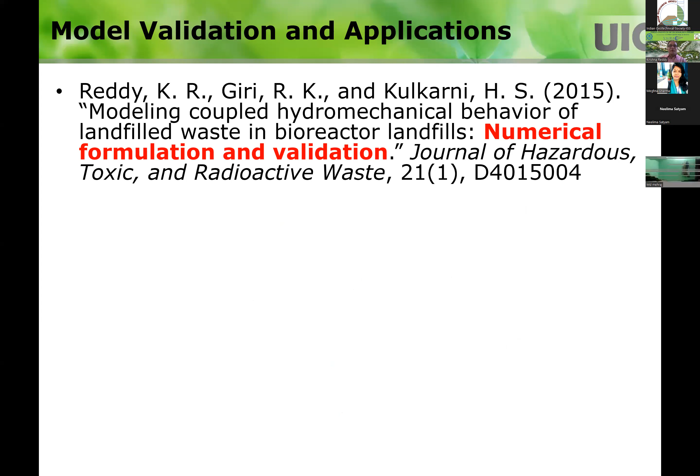Same thing with the drainage blanket. So this is the hydraulic modeling, that's the first phase of our research. That was like a one PhD thesis, a lot of effort. Sounds simple, but it requires a lot of patience and dedication. So these papers are there, I gave you the link in the chat box. Click that one, search with the keywords, and you should be able to find all these papers, the validation and other things.

Now then we said, okay, let's take a next step. So we have hydro, a little bit of mechanical, but let's make it a little more complete, bio is very important to consider, right? If we are looking time-wise, the biodegradation is important to consider. So here, what we wanted to do is incorporate bio aspects into our hydromechanical modeling.

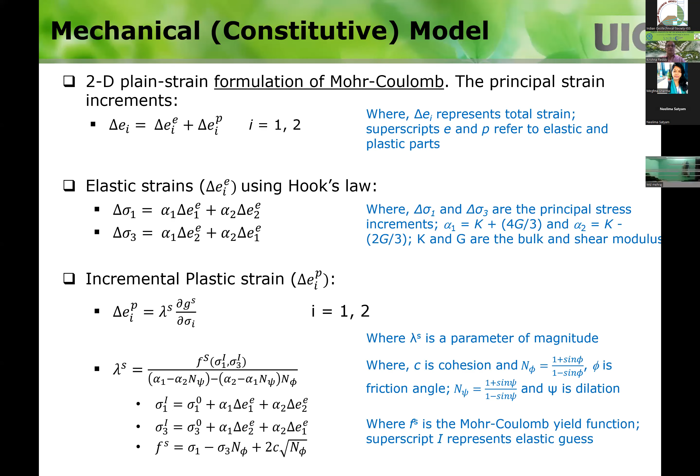The two-phase hydraulic flow model is kind of the same, whatever we have done during the first phase when we were doing the hydraulic modeling. That's the same governing equations that we have. The mechanical modeling is also same, we use the Mohr-Coulomb criteria. There's not much change, this was used in the first phase also. What is new was, can we combine - this is the same thing I mentioned, how we take the pore water pressures, pore gas pressures, and calculate the effective stress and use that effective stress in our mechanical model that will induce the strains. The biodegradation is the new part.

So how did we start this one? For the biodegradation, the most common model used for biodegradation of waste is the first order decay kinetics given in US EPA's LandGEM model. That's kind of a very commonly used model for gas prediction. I said that we can use that model to predict the gas generation. So we use that model.

But in the model, they don't have the effect of water content. What we did is we modified that one so that we can incorporate the effect of water content on this decay constant. So the decay constant is now a function of the water content. That's kind of a new add-on that we did.

Once you do that, we can predict the gas generation. Then what we did is we could calculate what methane is produced, and then we could calculate the maximum methane potential. Any waste that you have, there is a standard test called biochemical methane potential, and you can take the waste and run the test, and that gives you the maximum methane that is possible under idealized conditions. So based on calculated methane and the maximum methane potential, that gives you a degree of decomposition, DOD, based on this definition. So if DOD is 50%, it means only 50% of the total methane that could be produced has been generated. So then DOD can be used.

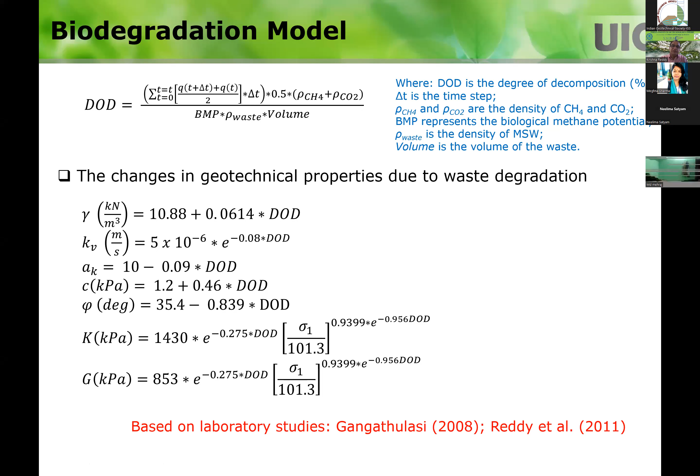When we were doing this modeling, we run for a certain period of time and calculate the DOD, and then from the DOD we change the properties of the waste based on these relationships and continue the modeling process. So this is the sequence: we inject the leachate, we do the hydraulic modeling, then we do the biodegradation modeling combined with the mechanical modeling, increase the time period, and repeat this whole thing. So this is the hydro-biomechanical framework that we generated.

Now, again, once we did this one, okay, how do we validate if this is a good model or not? Then we looked at the literature.

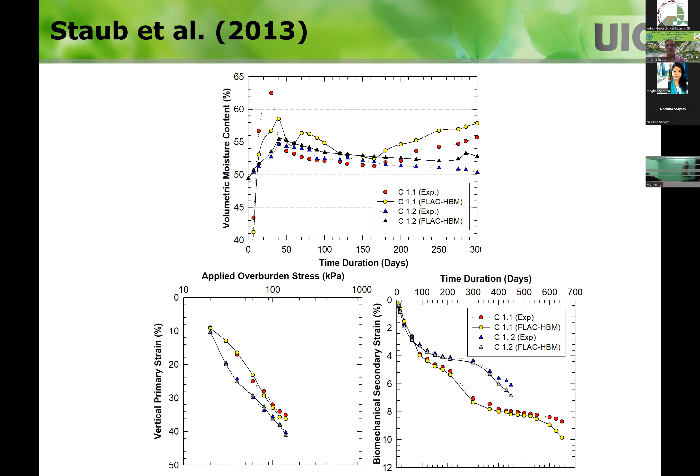This lab in France did large-scale experiments with extensive monitoring of the leachate distribution, settlement, and degradation aspects. We were able to model how the moisture content changes with time, with overburden stress, how the vertical strains are increasing in terms of primary strains versus time, and how creep and biodegradation are affecting the settlements. The model results are pretty good.

Then we looked at another study done in the field. These researchers dug and created big lysimeters with waste, characterized all the waste, and started leachate injection into this waste, monitoring different aspects. So we looked at the same things with our model versus the field-monitored results in this lysimeter.

So we got confidence that we validated with the controlled lab experiments and controlled field experiments. Whatever predictions we are getting are pretty reasonable. So why don't we apply it to a large-scale model?

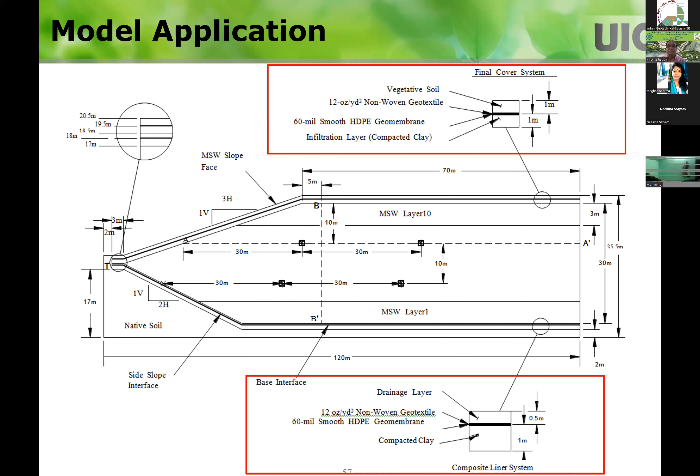This is the Subtitle D engineered landfill. You have a liner system at the bottom that is properly designed, and a cover system designed properly. During placement, they put horizontal trenches—these are for leachate recirculation.

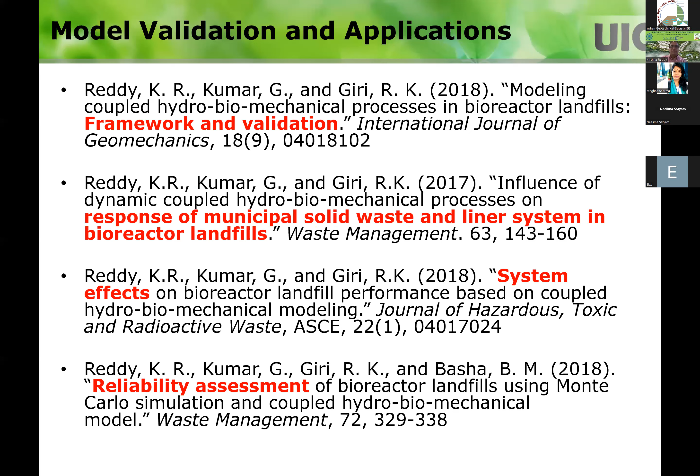We basically did a parametric study on system variables. We listed very different things to see what response we get. The modeling framework and model validation are given in some other papers—you can see all these papers. We also did heterogeneity assessment based on probabilistic analysis. You can find all these papers in the link that I mentioned.

So that was done, but we were not happy. Why weren't we happy? We didn't really truly couple hydro, bio, mechanical aspects, and we needed to combine the thermal aspects. We totally ignored the thermal aspects.

So here we wanted to add the thermal aspect and create a model. What we did is work with Cal Poly researchers who worked extensively on modeling thermal aspects of landfills. We took their formulation in terms of heat transfer, volumetric heat generation—that empirical equation they gave—and the surface ground temperature assumption, and gas production rate based on the US EPA LandGEM model.

For the decomposition rate K, what we did is make it a function of saturation and temperature. So FW represents the water fraction, and T is the temperature—this is our contribution. We incorporated this so that wherever the moisture is different, the degradation rate is different, and the temperature is different, the degradation rate is going to be different. So the degradation of the waste is a function of moisture and temperature.

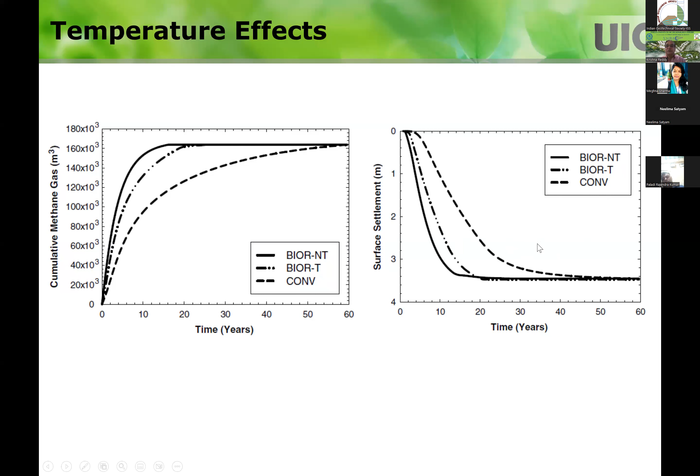This is the conventional case where you don't inject leachate, nothing. The bioreactor landfill, with temperature versus not accounting for temperature—those are the things considered here. This is the paper that looks at this one.

Now, if you look at this, all this work was done. We were happy, but not very happy. Why weren't we very happy? Because temperature is taken in terms of an empirical way.

Biodegradation is based on the US EPA LandGEM model, which is the empirical way. So we have a thermal process, biological process, and mechanical process, which is basically Mohr-Coulomb, a simplistic constitutive model that may not be valid for material like waste.

So we thought there should be a way to pursue this modeling through a fundamental approach. How can we not use these empirical approaches, but instead look at the fundamental basis and incorporate thermal, hydro, biomechanical modeling? So for this, we developed a fundamental biochemical model.

Instead of the LandGEM model as a simplistic empirical model, we developed a fundamental biochemical model. Instead of using that empirical thermal model, we developed a fundamental thermal model. And then we developed a constitutive model—instead of a Mohr-Coulomb model, we wanted something that better represents the waste's sustained behavior.

All those things are integrated with the two-phase flow model. We didn't change anything in the two-phase flow model because it was fundamentally formulated correctly from the beginning. So based on all these things, we got the CTHBM model: coupled thermo-hydro-biomechanical model.

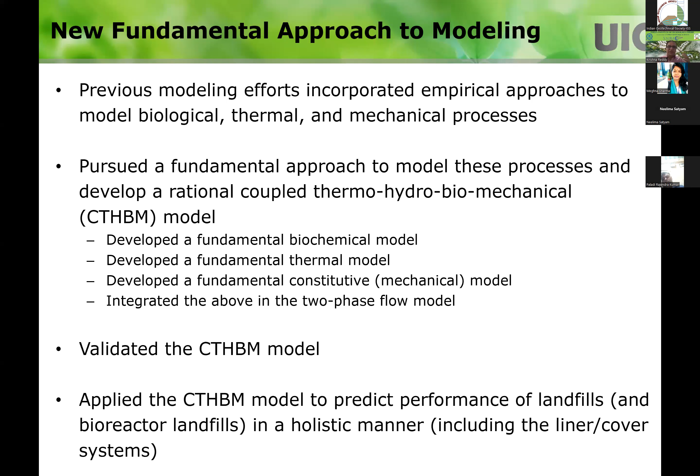That makes really good sense—that's closer to reality than all the assumptions we made before. So let me go a little bit faster.

The two-phase modeling is exactly the same as what I talked about in our hydraulic model. For the biodegradation model, we used a two-stage anaerobic digestion model proposed by McDougall, where advection and diffusion are considered insignificant. In the waste, you have degradable solids that could be cellulose, hemicellulose, lignin, and protein.

In our model, cellulose is the dominant degradable fraction. This two-stage anaerobic digestion involves two processes: hydrolysis plus acidogenesis, and then methanogenesis. So we looked at those two stages of the anaerobic digestion process.

That's the two-stage anaerobic digestion process developed by McDougall. We worked with McDougall on this aspect so that we weren't misinterpreting his data or his model. It was very nice to work with him on incorporating his model into ours.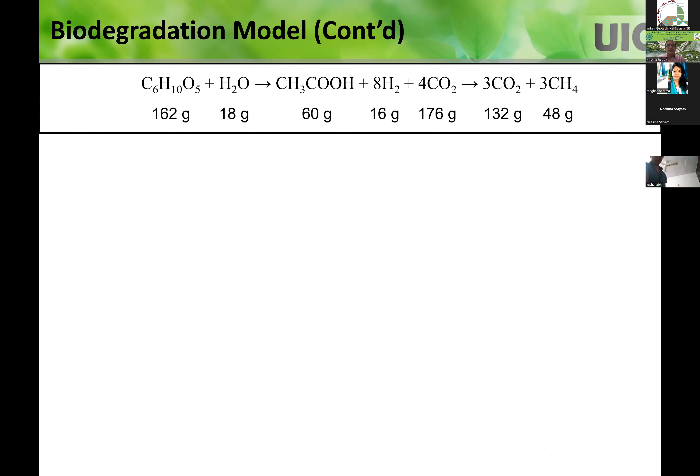This is the fundamental reaction that happens during the degradation process. You can see how C, the volatile fatty acids, changes with time. M is the methanogenic biomass, and how it changes with time. And S is the solid degradable fraction, how it changes with time.

The d-theta is the volumetric water content, how it changes as a result of change in the solid degradable fraction. In these terms, Rg, Rh, Rj, Rk are the rate constants, which can be calculated based on these equations.

The gas generation rate can be calculated using this equation. So we are not using that LandGEM empirical model, but instead using these fundamental biodegradation processes to calculate the gas generation rate.

Once we get the gas generation rate, the generation rate of methane—applying the enthalpy—lets us calculate the heat generation. Again, this is more fundamental; we're not using any empirical equation for the heat generation. It comes from the biodegradation, determining how much heat is generated by biodegradation.

So the thermal model we have is based on the heat we generate from biodegradation. That heat can be used, applying the balance of energy, specific heat capacity, and the heat conduction equation. So anaerobic digestion generates the heat, and that heat is distributed through conduction and convection.

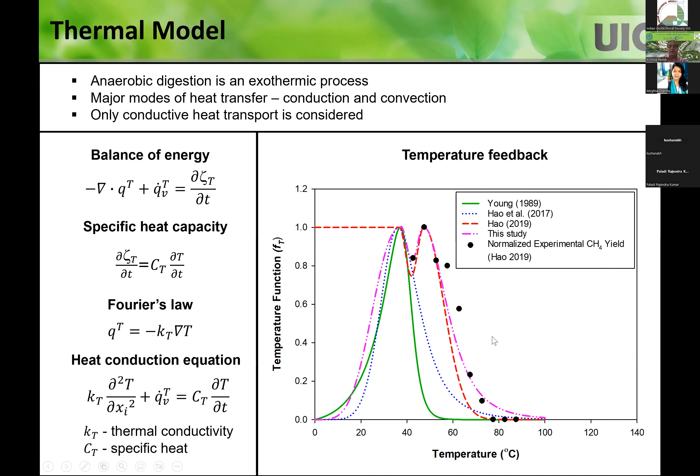So biochemical and thermal, they are interrelated. Biodegradation causes thermal effects, and thermal effects are going to affect the biochemical processes. So this is a looping interdependency. We were able to model this fundamentally and incorporate it in the numerical model.

Now the mechanical model. Remember previously we used the Mohr-Coulomb model, but we wanted to use something better than that because we know that that is not really true. So total strain is given by this equation. You have an elastic strain, a plastic strain, a rate-dependent strain, and this is the biodegradation-induced strain.

So what we did is we looked at the literature to see which models can really do this. The closest that we could come was from my PhD research, where I did constitutive modeling. I did lattice elastoplastic modeling, and I did endochronic model or thermodynamic model. I evaluated two of those models for cemented sands, but there you don't have viscous effects, you don't have biodegradation effects.

So the closest that we found is the soft soil creep constitutive model that can really model the elasto-viscoplastic strains. So we use that one. We can get the elastic strains, we can get volumetric creep strains, and apply that. Basically, it's creep-induced hardening, general creep strain. In this model, we use the cap type yield surface, and the yield criteria is given by this.

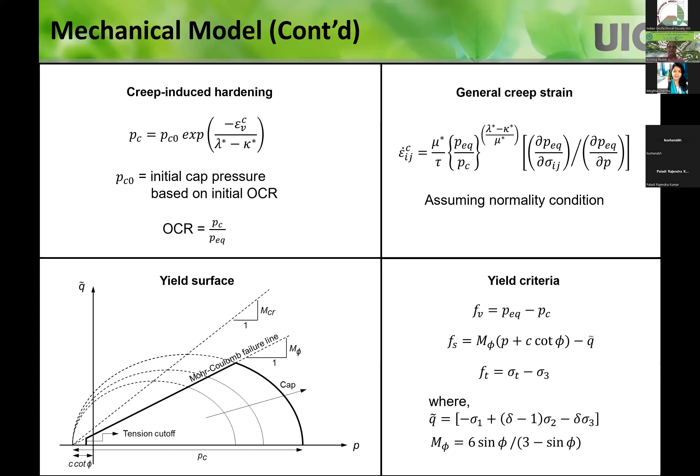Incorporating all these things, the other thing that goes into this modeling, which is unique to the waste and not to soils, is biodegradation-induced strain. The biodegradation causes change in the volume of the voids, and more importantly, it changes the volume of the solids, which does not happen for soils. You have reduction in the volume of solids because some solids convert into the gas phase—organics converting into gas phase—and then there's a reduction in the volume of voids.

So using this, considering all these things, you get a governing equation given by this. We have a detailed methodology of how we did our calculations in the paper that you can see here. This is the elasto-visco bioplastic modeling constitutive model, right?

So now we have all these components. We have a 2-phase flow hydraulic model. We have a 2-stage anaerobic biodegradation model. We have an elasto-viscoplastic mechanical model. We have a heat conduction model. It will take some time to understand what's going on in between these things, but they are all affecting each other—they are all coupled.

2-phase flow is going to affect this one, this is going to affect the heat, it's going to affect this, and these are all coming back and forth. All these things are going to be affected. So at any time, these will all play a role, and then you will know how much is the reduction in the volume of voids, reduction in the volume of solids. You can predict all the gases, and all kinds of information about the waste can be understood.

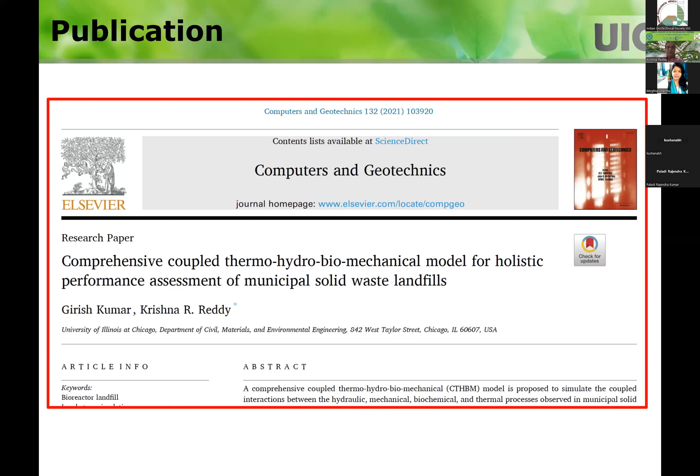So coupling all of them, we got a very comprehensive model that can realistically inform us on how the landfills will perform under different conditions. So this is a kind of new model. We want to see if it works.

Again, we had looked at any lab tests that we could use. Truly, you don't have any lab testing that monitors all the things that we need—temperature, biochemical processes, mechanical processes, all these things. We didn't find anything, but we found some lab simulation testing that considered the biodegradation parts. Here is one landfill study that looked at lab scale experiments, where no stress was applied, but they circulated the leachate and looked at what is going on in the waste in terms of the biological terms.

And then there is another study - this one was done in the US, this one was done in the UK - where they were able to apply the load and circulate the leachate, and be able to look at all the things going on.

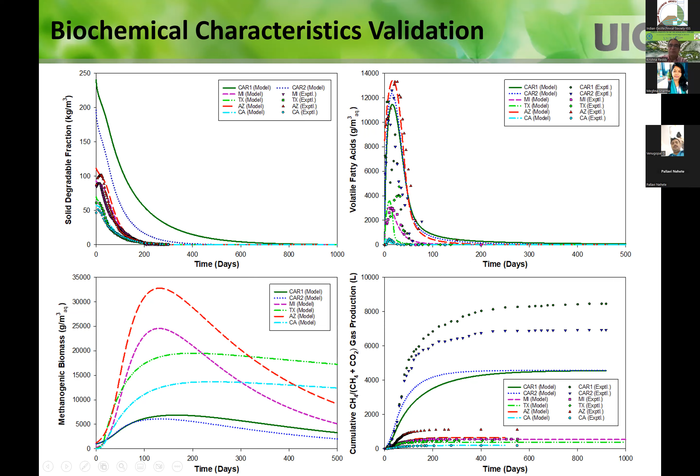And then for the other model, the UK experiments, we were able to match the results pretty closely. So we gained a little confidence that the model is fine.

Now we wanted to see how it can be applied to a whole landfill scenario. So again, we looked at the same landfill we looked at before - it's a realistic landfill that exists. We looked at conventional landfill versus bioreactor landfill. Let's say the leachate is injected into horizontal trenches in an assumed layout continuously, with injection pressure of 50 kPa. We have 4 horizontal trenches within this configured area, with horizontal spacing between trenches of 30 meters. So then we were able to model this.

So we put all that into the model - cross section, leachate injection, everything - and simulated the placement of the waste in layers. Then, once we put the cap on top and let time pass, you can see how different things evolve.

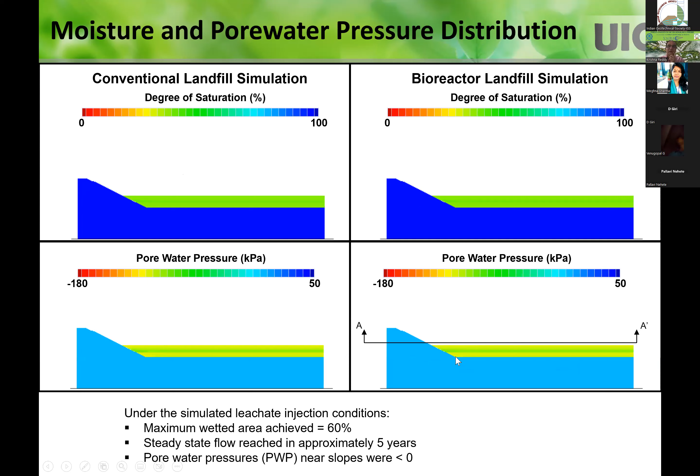And if you see the pore pressures here, they're not high close to the slope, which is good because you won't have any slope stability problem. This is the slope edge, and the pressures are not high compared to other locations.

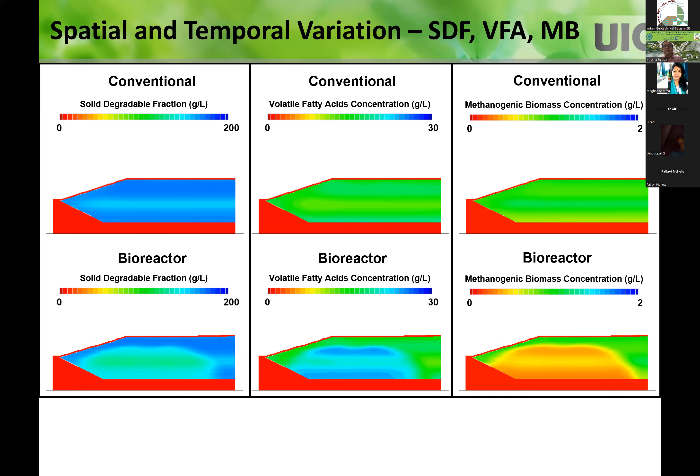And then you can look at the solids degradable fraction, and understand how biodegradation happens in conventional landfill versus bioreactor landfill, and what the volatile fatty acids and methanogenic biomass concentrations look like as they change in this landfill. In a conventional landfill, not much is going on, you don't see much change. But in bioreactor landfills, you see much change within a short period of time. The conventional landfill will take a long time - it keeps on happening slowly.

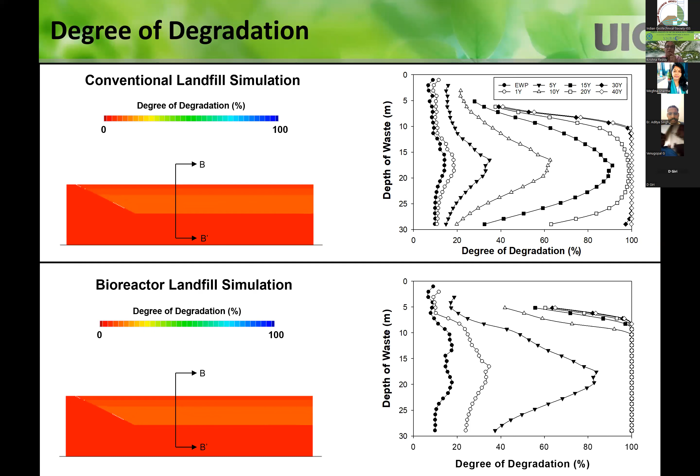So the degree of degradation - how the waste is degrading. In the conventional landfill simulation, you see it slowly happens, more in the middle, and then spreads to the top and bottom. The waste in the middle, because of the high temperature there, degrades faster. In the bioreactor landfills, again, you can see how the degradation happens fast.

Now, if you look overall at the gas production - bioreactor landfill versus conventional landfill - the conventional landfill takes a long time to reach its maximum amount. In the bioreactor landfill, most of the biogas happens really quickly, within 10-15 years, as compared to 30 years for the conventional one. And these are things you can predict.

You can look at the stabilization time. With this modeling, I can say if you operate this properly, with all modeling conditions correct, you're going to stabilize it in 12 years. In a conventional landfill, it takes 33 years. With realistic modeling, I can trust that these numbers are kind of close to reality - assuming all my modeling assumptions are correct.

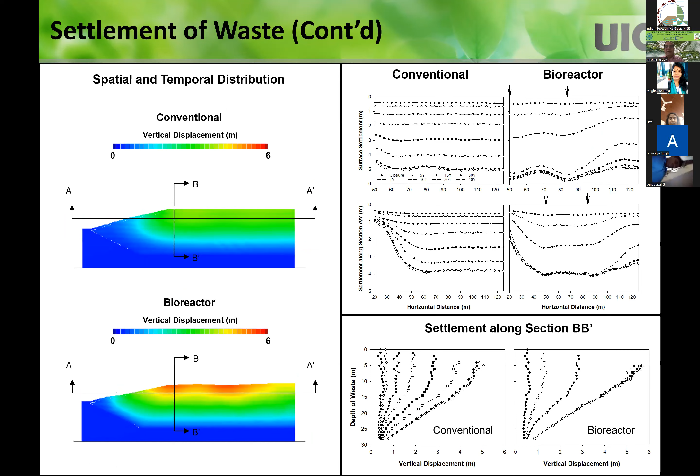Now, we also considered one set of parameters, right? And parameters could be different. We assumed 25 kPa injection pressure, injection spacing of 30 meters, and continuous injection. These are not standard, these things could change. So based on the potential variability of these operation parameters, we looked at different parametric analyses.

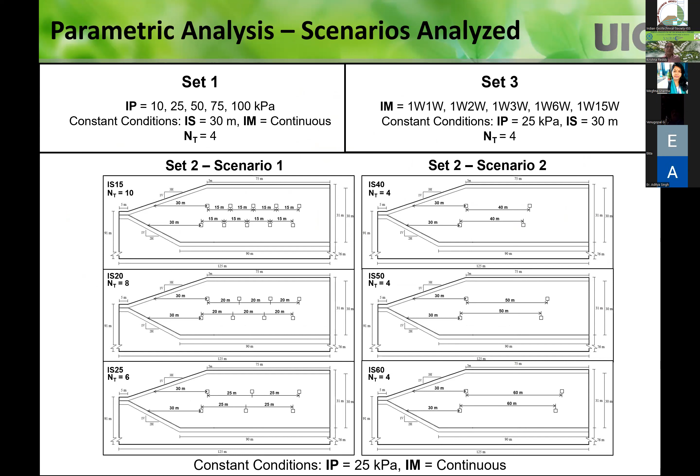We changed the injection pressure for different conditions, and we changed the mode of injection. All these things we varied, wanting to look at if conditions are different, how will it change. All these things are summarized in one of the papers.

Now, the biggest problem doing modeling in waste or landfills is people say, okay, waste is highly heterogeneous, how can you model it, right? That's the biggest concern. You cannot have deterministic modeling because things change. So in order to assess the variability of the properties of the waste, we did Monte Carlo simulation. We know the range or coefficient of variation for these different properties.

So we looked at how they vary, what is the mean, what is the coefficient of variation. We looked at all these things and ran these simulations, considering the different inputs not as fixed deterministic values, but as probabilistic values. So basically what we found is deterministic analysis slightly over-predicts the results. That's the conclusion we found.

So that's a lot of stuff to digest. I had to rush it a little bit, but as I said, if you are interested, look into the papers with a lot of details, and I will be happy to answer any questions you have, anytime in the future after you get a chance to read those things.

So in the closing comments, we have this new coupled thermo-hydro-biomechanical model that addresses all the key limitations of the previous models. And this was not an easy effort. It took us over 2 decades of intense research effort to reach this state.

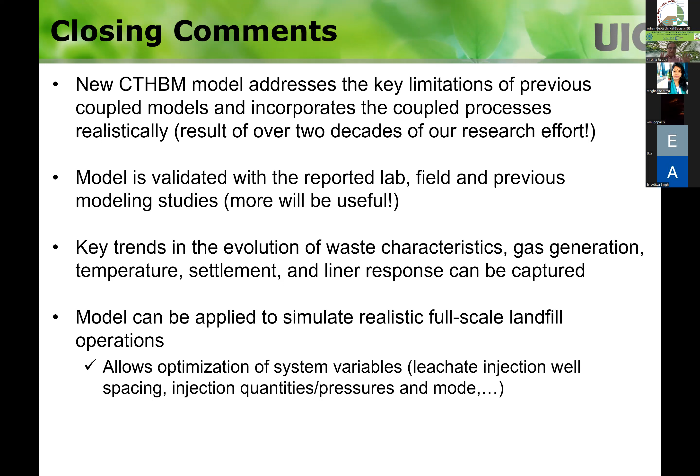And the model was applied to a realistic full-scale model, and this model can be used to allow optimization of the system variables - leachate injection well spacing, injection quantities, pressures, and more - so that the bioreactor landfill will be operated effectively and safely, right? That can be achieved by this. It ensures the landfill bioreactor safety and allows prediction of the stabilization time.

So just the last slide is - bioreactor landfill is the way if you want to really address sustainability in landfill engineering. So if you have a landfill and you put the waste and then cover it up and walk away, people might think that, okay, you're just dumping and walking away.

In a bioreactor landfill, you're containing the waste, but also you are doing the treatment. It's like a biotreatment, in situ biotreatment, in situ anaerobic bioreactor, a huge in-ground anaerobic bioreactor. You are treating it actively.

Once the biodegradation happens, you have inerts, and then you can do mining and recycle all the materials. You have short-term and long-term environmental protection. Energy recovery is possible because you're accelerating gas production, faster stabilization, and economic benefits. You don't have to treat the leachate, you're reducing post-closure cost, and there's land reuse. This is the only way you can convert the waste, stabilize and mine it, and then reuse the site.

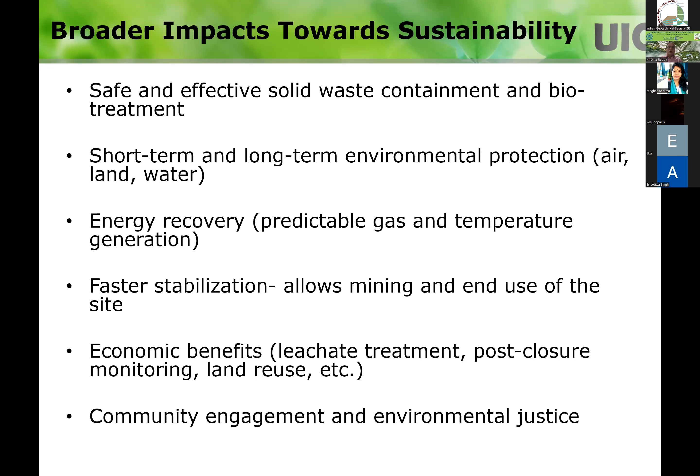The community engagement and environmental justice aspect: you don't want to dump it and have all the environmental problems affecting the communities around that landfill site. Even dump sites have a lot of problems, but even engineered landfills, you don't want to have any issues. So bioreactor landfill is a way we can engage the community and explain what we're doing, and overall protect the environment and achieve environmental justice.

So the whole idea is, instead of having a landfill and walking away, can we have a landfill cell, put the waste, close it, and operate it as a bioreactor landfill, and let it degrade until the stabilization time is reached, then excavate it and mine it. Once you mine it, you create a new cell again, and can we accommodate more waste in there and keep it going like this, so you don't have accumulation of waste and land not being used.

But if you are creating more waste, this is a sustainable way to manage and reuse all the waste. So that's the whole story about one of our ongoing projects. Hopefully that gave you some ideas on how these kinds of research issues can be tackled.